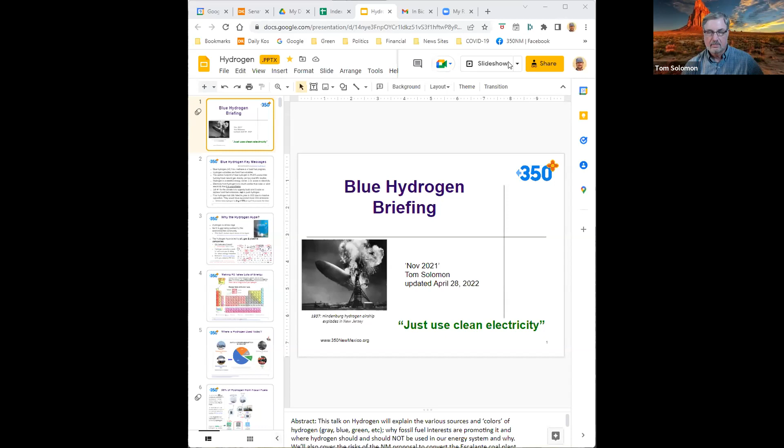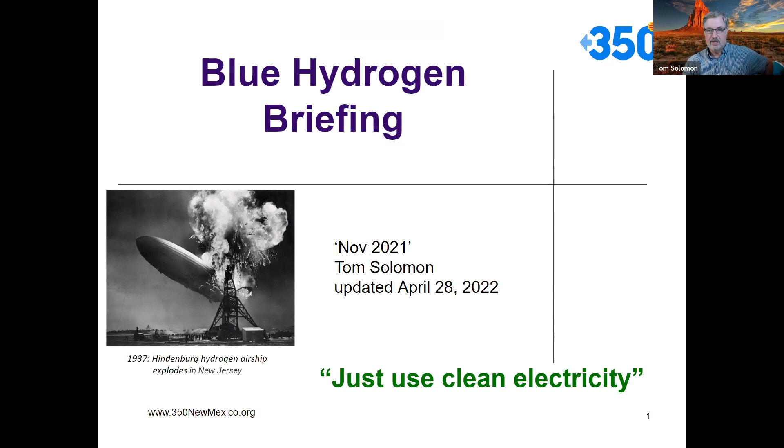So it's called Blue Hydrogen Briefing, and I am Tom Solomon. And that little picture of the Hindenburg blowing up in 1937 gives you a hint about what's to come. Hydrogen is a potentially dangerous gas, needs to be treated with significant care. And in most cases where they're proposing to use hydrogen, just using clean electricity instead is a much better answer.

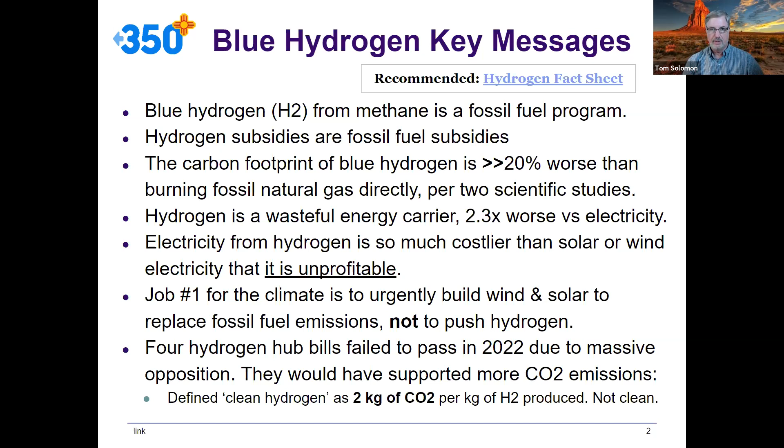So why is all this hype going on about hydrogen? It seems to be all the rage, but if you look within the environmental community, it's not being pushed by environmentalists who understand and really care about preserving a livable climate. And there's a very good report published some months back by Earth Justice that is just one example of the pushbacks that we're seeing from the environmental community. So where it's coming from is actually from the oil and gas and pipeline companies.

It started on or about 2017 with the formation in the European Union of something called the Hydrogen Council. And if you go on their website, you can conveniently see their logo sheet, which I've copied down here. And if you circle, which I did, the logos of the oil and gas companies, you see all of these various examples from British Petroleum to Shell to Chevron, Saudi Aramco and Baker Hughes and Southern California Gas, and oil companies from China and Saudi Arabia,

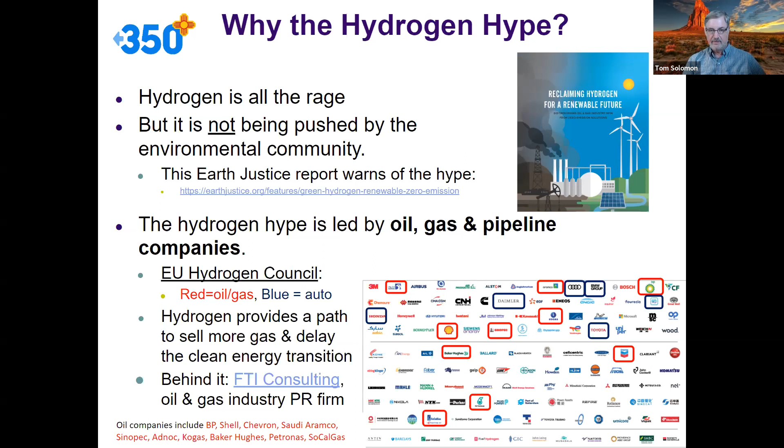et cetera. And so it is really a program of the oil and gas industry to provide a path to sell more natural gas, which is their product, and to delay the clean energy transition, which will reduce the sales of their products and their profits, which they don't like at all. And behind a lot of this marketing hype, which it largely is, is a company called FTI Consulting, which is an oil and gas industry PR firm. So a lot of this hype to push hydrogen as a quote unquote solution to the energy crisis and the climate crisis is from FTI Consulting and oil and gas.

Let's just start with the basics here. So what is hydrogen? It is actually the smallest atom in the universe. That's the periodic table, and here it is in the upper left corner. It contains one proton, so it is tiny, and it doesn't actually occur much in nature by itself.

Molecular hydrogen, or H2, is highly reactive, so you find it in combination with oxygen in the form of H2O, or water, or in combination with various kinds of carbon in various hydrocarbons such as methane, which is CH4, or butane or propane, or all of the other hydrocarbons, but in this example, mostly methane. And so it takes a lot of energy to pry off either the oxygen or the carbon from those complicated molecules to create pure molecular hydrogen, or H2.

So that's why we say hydrogen is an energy carrier, not really a fuel, because you have to invest a lot of energy up front just to create it, and then you have to transport it somewhere like any other fuel to do some useful work down the line.

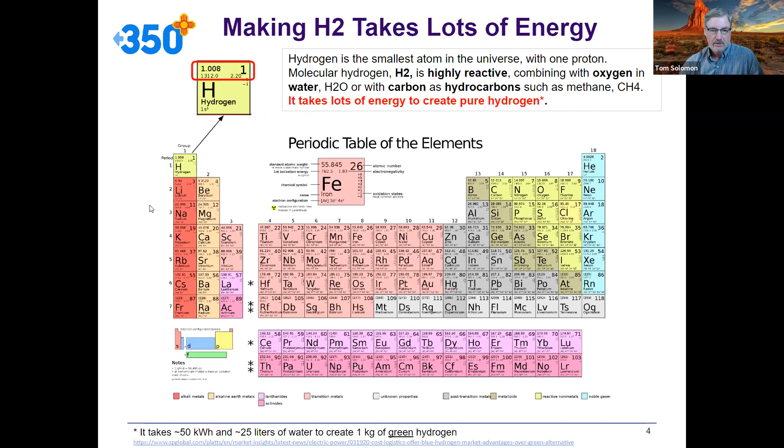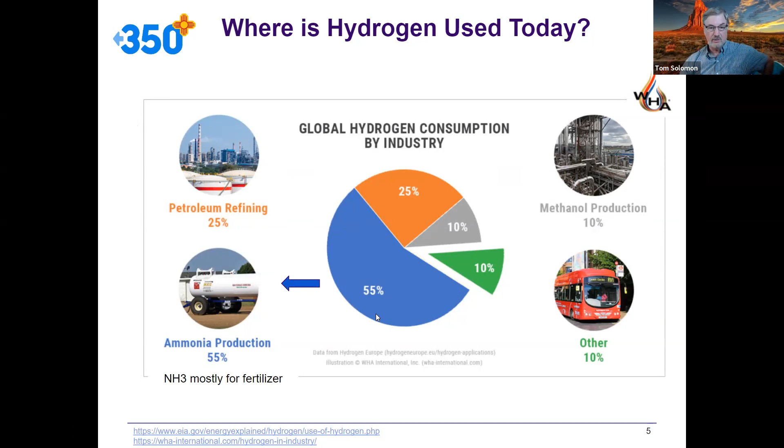Where is hydrogen used today? Well, the vast majority of it is used in producing ammonia, mostly for fertilizer. 55% is that. Another 25% is in various forms of petroleum refining. There's another 10% slice which goes into methanol production, and another miscellaneous 10% other, which goes into other various forms. So it is mostly ammonia production and petroleum refining.

And it is almost all made from fossil fuels today. About 98% of worldwide production of hydrogen comes from fossil fuels, mostly methane. And this is a chart that some groups have put out to explain how you start with some source and then turn it into hydrogen. And I am going to just talk about 3 of these versions of it. This is all hydrogen, but they call them different colors just to denote how it was made. And the cleanest form of hydrogen is what's called green hydrogen.

It releases hardly any carbon dioxide, because if you produce it from 100% clean renewable energy, or maybe nuclear power, which doesn't emit much carbon, at least at the point of production, and you pass that electricity through water in a process called electrolysis, it bubbles off hydrogen and oxygen, and you capture the hydrogen, and that's the purest form. They call that green hydrogen.

But 98% of all the hydrogen that's actually produced is really from methane or natural gas, same thing. And you take this methane, which is CH4, you run it through a very high temperature, high pressure industrial process called steam methane reforming. And that's one of these steam methane reformers. That's what that looks like. And it produces largely 2 things. It produces a lot of carbon dioxide, and then it produces some hydrogen.

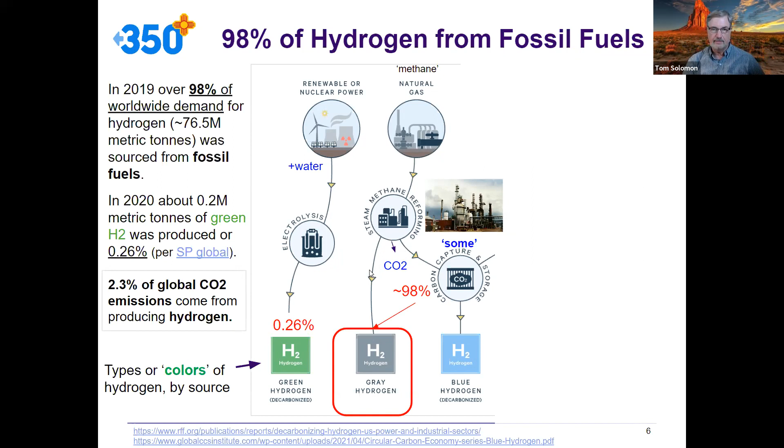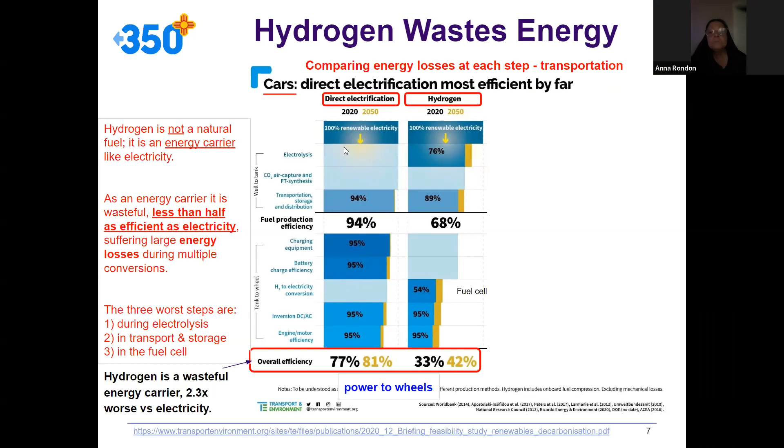And then within the car, you've got to have the charging equipment and the battery storage. You've got to convert direct current to alternating current and then run the motor. Each of those is about 5% losses. And if you multiply all of these losses together, of the 100% renewable electricity you started with, you've got about 77% left to power the vehicle, the power to wheels. And that is actually pretty darn good in the world of energy accounting.

In the case of hydrogen, you start with 100% renewable electricity, and in the green hydrogen version of this, you take that electricity, run it through water in the process of electrolysis, bubble off the hydrogen, capture it, and then transport, store and distribute it. You're already at about 68% efficiency, because electrolysis is only 76% efficient, and it's 89% efficient to store and transport hydrogen.

And then you've got the fuel cell. So within a fuel cell vehicle run by hydrogen, the fuel cell starts with hydrogen, runs it through, creates electricity, and that is then used in the remaining portions of the electric vehicle, converting it from DC to AC, and then running the motor. All of these losses multiplied together mean you've only used 33% of the renewable electricity you started with in the case of a hydrogen car to power the wheels.

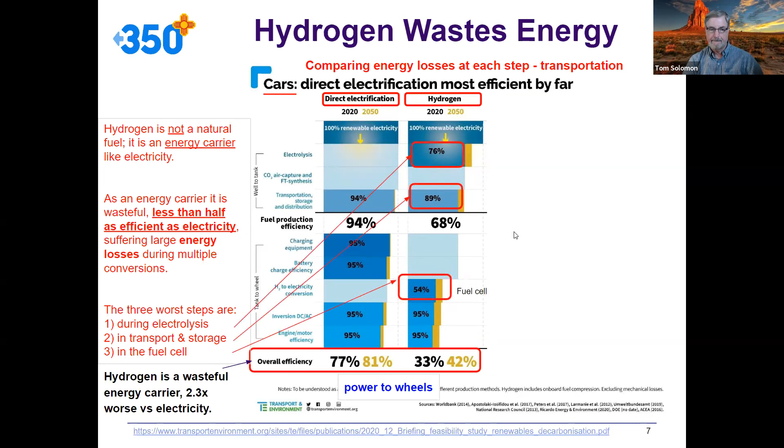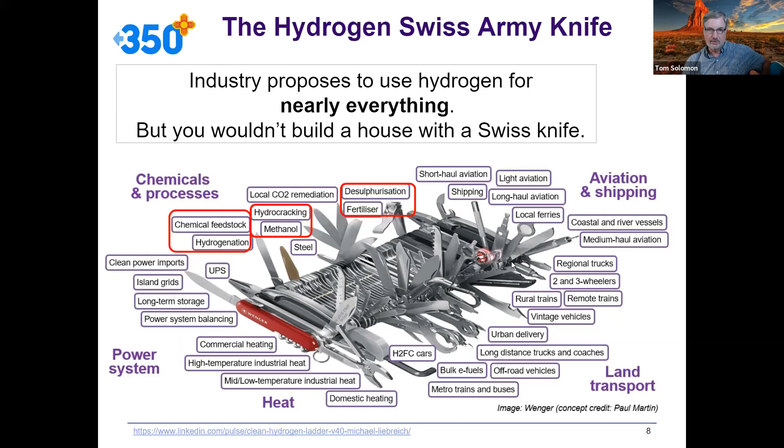But they're proposing also to use hydrogen for aviation and shipping, for ferries, for regional and long distance trucking, for urban delivery, trains and buses, domestic heating, industrial heat, electricity generation, all sorts of stuff. And in fact, theoretically, all of those things are possible, but they're not economically feasible because they've got to compete with something better, which is direct electricity. So just like you would never use a Swiss Army knife to build your house, you would use electric power tools. You're not going to use hydrogen for a lot of these things.

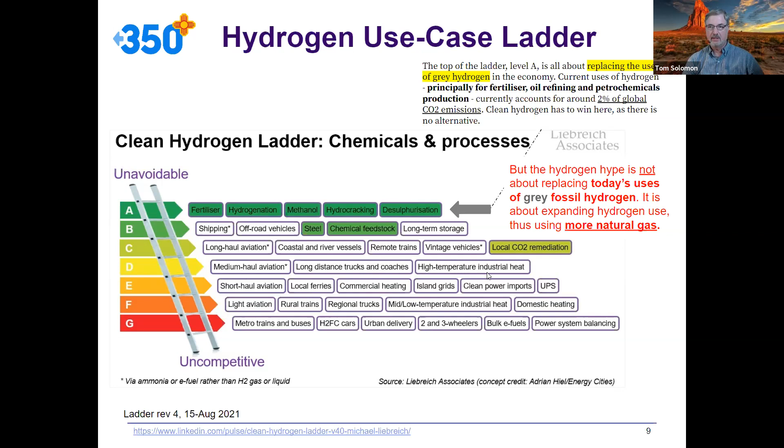So after that introduction, I want to focus on a very particular example here in New Mexico that is a project that is underway right now. And it is to convert an old 40-year-old coal-fired power plant in the middle of New Mexico, just outside the town of Prewitt, not far from Grants. And it is called the Escalante Coal-fired Power Plant.

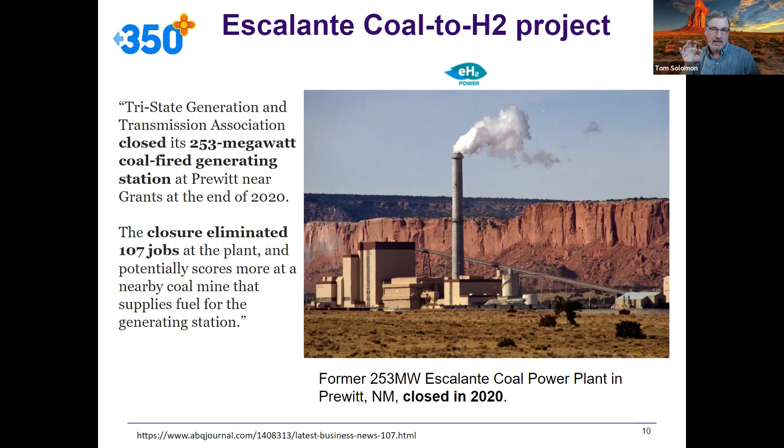It was closed in 2020 after about 40 years of operation. It used to be a 253 megawatt coal-fired generating station, sort of medium-sized. It used to employ 107 people there, but they've been laid off largely because the plant closed in 2020. A company called EH2 Power, which stands for Escalante Hydrogen Power, was formed in order to convert this old coal-fired power plant to both produce hydrogen and then to burn it for electricity. And we're going to talk about that.

But to do that, and the process of converting it and doing all that work, they have to do a bunch of things first. They have to build what's called an air separation unit, which is a way to cryogenically freeze atmospheric air into its components of argon, oxygen, and nitrogen, because they need to use that oxygen in the power plant, in the steam methane reformer. They have to build that steam methane reformer, that big industrial facility, to take the natural gas and convert it to hydrogen. And then all that carbon dioxide comes off. The question is, what do they do with that?

So then they have to build a carbon dioxide sequestration unit, which I don't have a picture of, but that is a third part of what they need to build new on this facility to do what they're planning to do. To run all of these three things takes a bunch of electricity. So any electricity that they generate at that former coal-fired power plant, which will be converted to burn hydrogen instead, will cut the actual amount of electricity that they could send to the grid, because they've got to power these other things internally first. That's called parasitic loads.

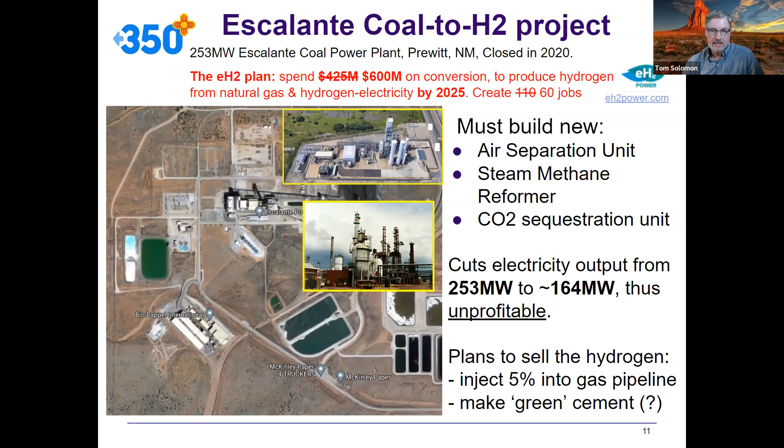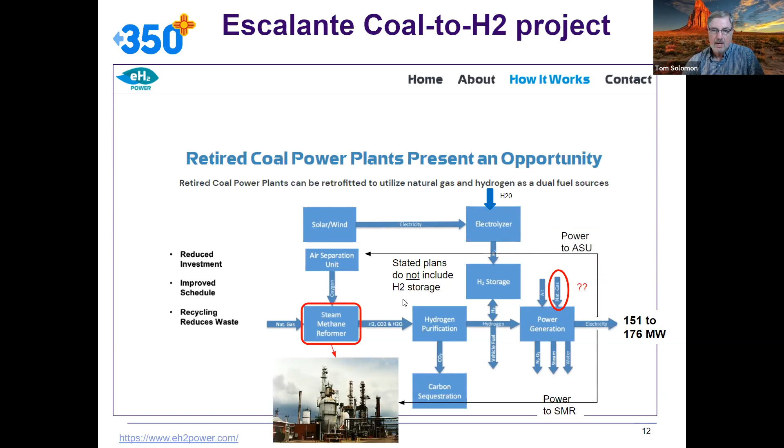So this is just explanation of the flow chart that they put on their website, showing the air separation unit, the steam methane reformer. This is from their website, by the way. Hydrogen purification, generate power, all of that stuff. These black lines I put running off of the output of electricity, just to show you that they've got to have a parasitic load to run the air separation unit, the methane reformer, and the carbon sequestration unit. So that's the plan of Escalante Hydrogen Power. I'm going to skip this slide, a little too detailed.

Remember I talked about them planning to possibly blend some of that hydrogen into a natural gas pipeline that is actually already nearby. And why would they do that? So there's a company called Lazard Investments and Banking that does the gold standard of analyzing the cost of generating electricity from various sources, various kinds of renewable energy, conventional energy, from natural gas, nuclear, coal, gas combined cycle. And they have the costs from high to low for each one of these things.

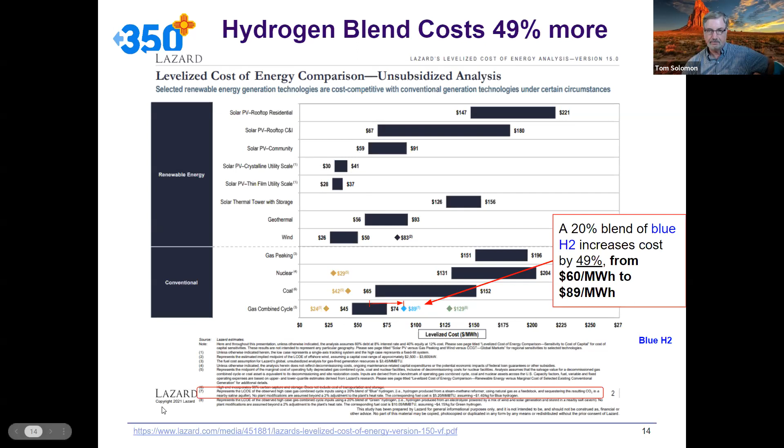Who funded Escalante Hydrogen Power? Well, according to their press release on their website, a company called Tallgrass Energy funded it, and they put on their website a press release: Tallgrass Energy acquires 75% membership interest in Escalante Hydrogen Power. So who is Tallgrass Energy?

Well, they are an owner and operator of about 8,300 miles of natural gas pipeline plus some 850 miles of crude pipeline. And so they are in the business of shipping and then selling natural gas mostly. And that's what the Escalante hydrogen facility is planned to do, is to take this natural gas. So they're looking presumably to create another customer for their product.

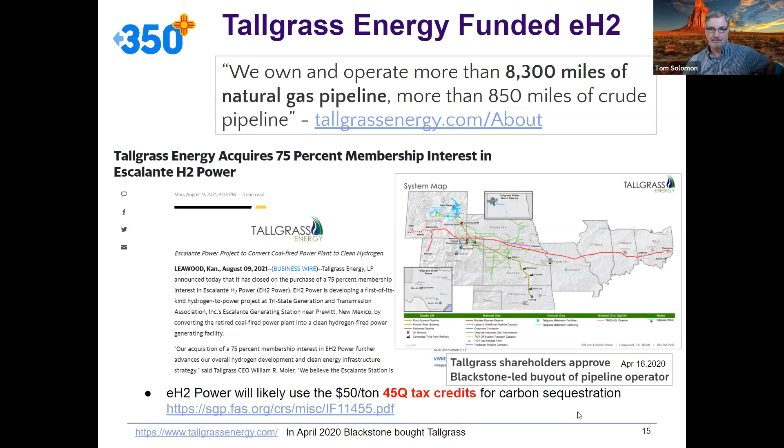The other thing it looks very likely that EH2 Power will do is to mine the federal tax code for something called the 45Q tax credits, which is a federal tax credit created to provide a benefit to people who do carbon sequestration. And they get to write off about $50 per ton of carbon dioxide sequestered within this part of the federal tax code. So that's their plan for producing hydrogen and for making it profitable, funded by natural gas.

There is another company in New Mexico looking at producing hydrogen from methane or natural gas, and it's called Bayotech. Bayotech is a spinoff of Sandia Labs, and they make these things called modular hydrogen hubs. They look like this, about the size of a big house. And according to their website, they produce gray hydrogen from natural gas with what they call a more efficient modular version of steam methane reforming.

And it emits lots and lots of carbon dioxide. In fact, it emits 9,000 kilograms of carbon dioxide for every 1,000 kilograms of hydrogen produced. So a 9-to-1 ratio of CO2 climate pollution for every bit of hydrogen they produce, 9-to-1. And they also produce NOx emissions in addition to the CO2. NOx is an additional air pollutant that needs to be regulated. It's a precursor to smog.

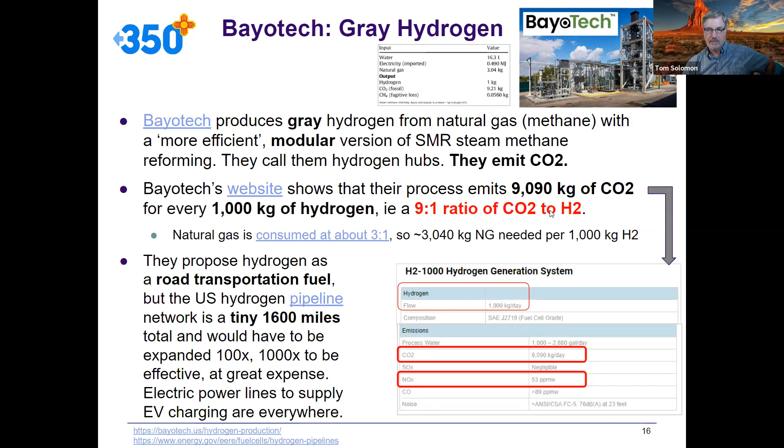So this is another proposal for what to do in New Mexico with hydrogen hubs. I think the proposal from Bayotech would be to make these units and possibly place them next to the interstate highways and produce hydrogen for fueling hydrogen powered cars or trucks along the interstate. But they would be producing lots and lots of carbon dioxide as a price for doing that.

So let's look at the science. There have been at least 2 very good peer-reviewed scientific papers published about what is the carbon footprint of producing blue hydrogen. And the first one was published in August of last year by 2 PhD scientists called Robert Howarth and Mark Jacobson. They're from Cornell and Stanford universities. And their paper is called How Green is Blue Hydrogen?

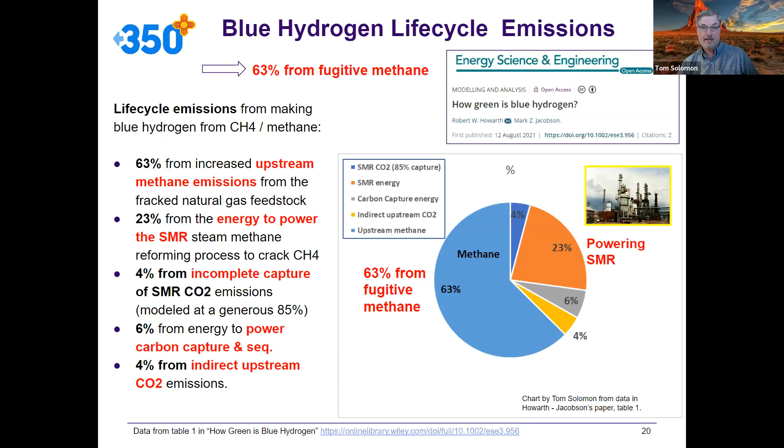This is the second paper that was published, warning of hydrogen climate impacts. This was actually published out of Australia in the journal Applied Energy, November of 2021, by Fiona Beck, a scientist from Australian National University, who came up with similar conclusions: that making hydrogen from fossil fuels produces substantial greenhouse gas emissions that are the driver for global warming. So scientific paper number 2, fully peer-reviewed science.

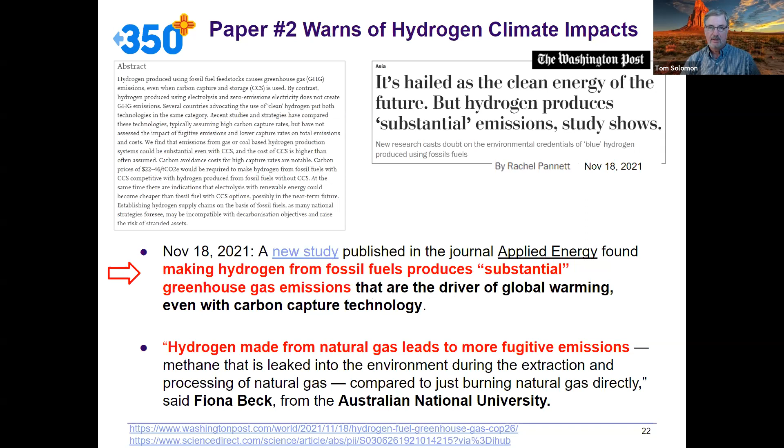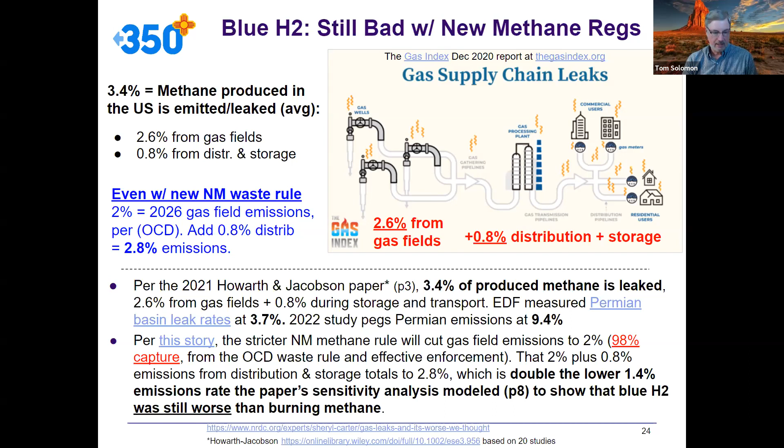But that's 2% from the fracking fields. Then there's all of the pipelines that go to the end users, from which about another 0.8% is lost, and the state of New Mexico is not doing anything about those. The bottom line is that even with the new methane waste rules and clamping down on fracking field emissions, it's not going to get anywhere near low enough in terms of upstream methane leaks to meet the requirements of making this a quote unquote clean hydrogen fuel, because upstream methane emissions, despite their best efforts, will continue to be a significant problem for the climate.

And after that, earlier this year came this quite frankly shocking report, a scientific study published in March of this year, a very extensive actual survey using airborne equipment, looking at 26,000 active wells over 35,000 square kilometers. And they concluded that we're actually emitting methane to the tune of 194 metric tons per hour in the Permian Basin, which is not 2%, it's not 3.4%, it's actually 9.4% of all gross methane gas production in the Permian Basin leaking into the atmosphere today. So the actual situation is dramatically worse than what was modeled in those papers.

So that makes burning Permian natural gas something like maybe 3 times worse for the climate than just running a coal plant, because of this uncontrolled fugitive methane emission. Now, this is part of the problem that the state of New Mexico and their new methane rules are trying to fix, but it's going on right now and they've got a lot of work to do, and we are nowhere near hiring and retaining enough people in those agencies to police this amount of pollution.

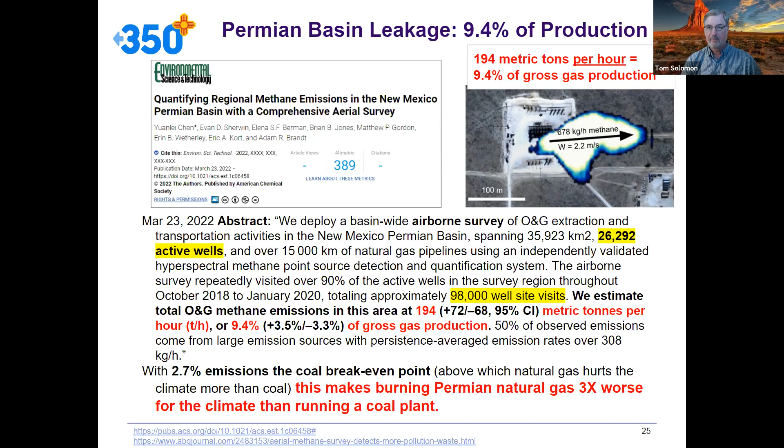So what is methane doing to the atmosphere? It is driving about 25% of all global warming, according to the reports of the IPCC, the Intergovernmental Panel on Climate Change. The reason why is that methane is a very powerful greenhouse gas with a global warming potential over a 20-year time frame that is 84 times worse than carbon dioxide, the main greenhouse gas. So a little bit of methane leakage multiplied by 84 gives you the impact of that much versus carbon dioxide.

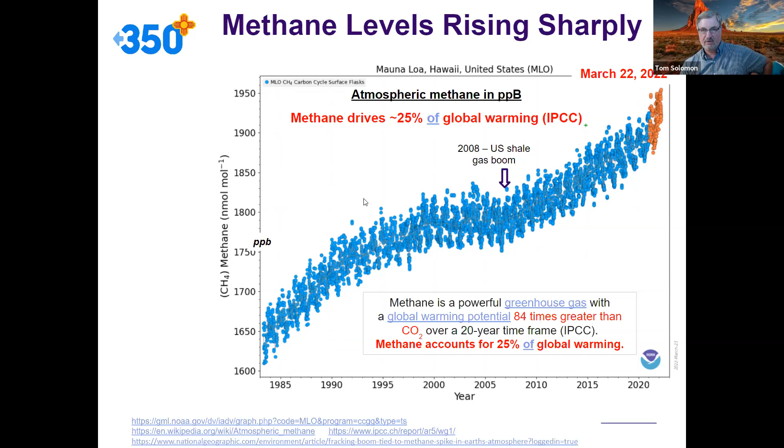It is a terrible source of greenhouse gas emissions and accounts, as we said, for 25% of all global warming, and it is going up. Since 1985, we used to see atmospheric concentrations of 1,600 or so parts per billion. Since 1985 all the way over to March 2022, we saw this dramatic increase from the 1,600 range up to the 1,900 range. And it is tied to the timing of the 2008 US shale gas boom, which was documented in this article published in National Geographic.

And so you just look at when the shale gas boom happened, and this plateau, which I'm not sure we completely understand why it flattened, but it went back up again dramatically as we really began fracking. So fracking is causing significant increases in methane releases. Anything that we do to use more natural gas means we extract more of this, which will mean more methane leaks, which will mean more impacts on global warming because of this.

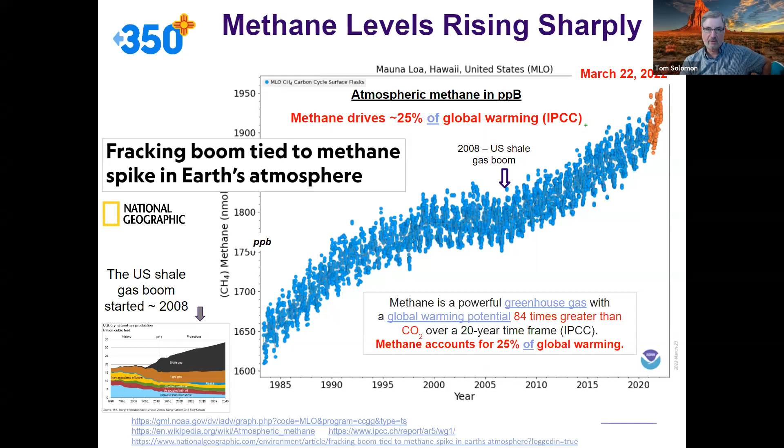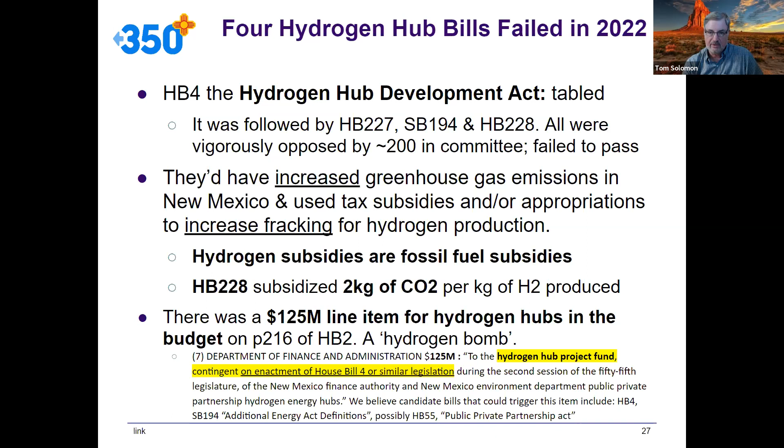So if you remember, there were 4 hydrogen hub bills that were proposed in the state legislature to subsidize the production of hydrogen from fossil fuels, from natural gas, methane. They were actually all defeated because of a tremendous turnout by activists showing up in hearings and calling legislators saying, don't do this. This presentation that you're seeing today was actually presented to 26 of our legislators to give them the background to understand why this was a bad idea. So thank you all activists for helping to do that.

Since then, the state government announced that they were going to join a potential consortium of 4 different states, Wyoming, Utah, Colorado, plus New Mexico, in a multi-state hydrogen hub initiative. And that is going on now. And I believe that will be discussed in the meeting coming up in the Legislative Finance Committee next week.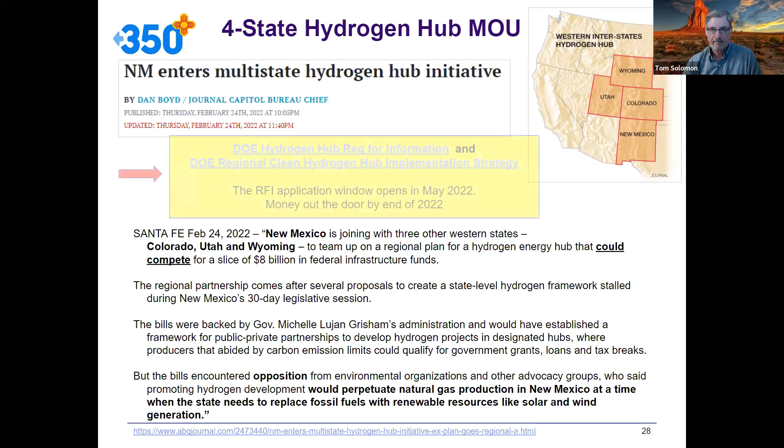for $97 million less than their original estimate, which would leave you $97 million that you could invest in some job creation in the town of Prewitt. Highly confident that we could figure out a way to employ 110 people in Prewitt with $97 million. In fact, you could just pay 110 people $88,000 a year for 10 years with that kind of money without doing anything. So there are much better alternatives than to do what they're proposing. And this is where my math is.

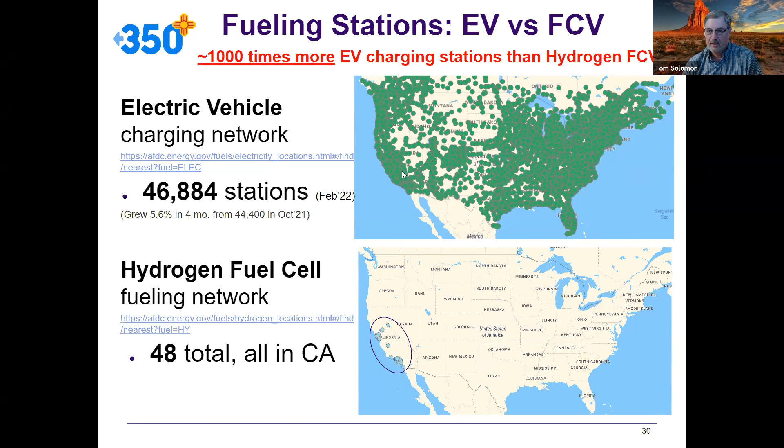Compare that to the hydrogen fueling network nationwide, which literally exists only in California. Only in California. There are 48 total hydrogen fueling stations in the state of California. There are none in the rest of the nation. Any proposal to use hydrogen as a fuel for nationwide trucking or cars has to build first a nationwide fueling network for hydrogen, which does not exist, and to compete with the already growing and low-cost charging network for electric vehicles.

There is such a thing as hydrogen fuel cell vehicles. There are 3 main ones from Toyota, Honda, and I think Hyundai. The main seller is the Toyota Mirai. That's what it looks like. Those 3 vehicles together sold a total of 3,341 vehicles in all of 2021, compared to US electric vehicles, which totaled about 180 times more at 600,000 electric vehicles.

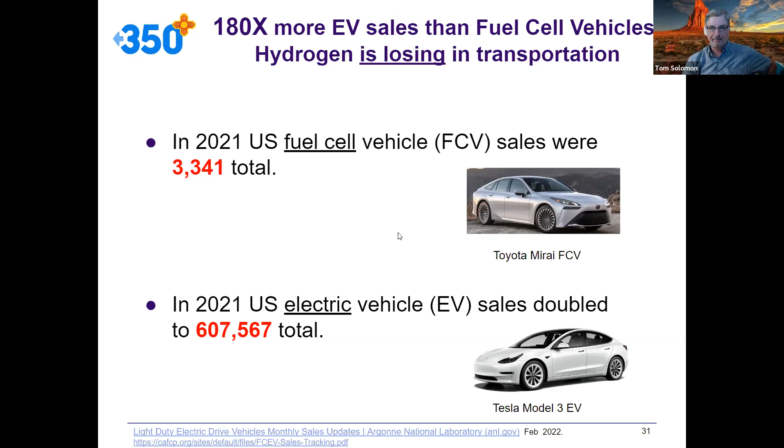So the fuel cell vehicle market is not taking off despite a lot of subsidies being applied by Toyota specifically to do that. And there are much better ways to solve most of the hard to decarbonize sectors that the hydrogen proponents talk about. This slide is maybe a little bit more in depth than I want to cover today, but you can review it later.

One of the things that the hydrogen proponents talk about is that industry needs to be decarbonized, and it could be responsible for 23% of direct emissions. There are lots better answers for a lot of the things that they're talking about. And most of the hard to decarbonize sectors, which are really steel, cement, plastics, and chemicals, have better alternatives. Some of them, we still will need green hydrogen, especially for steel. But that is

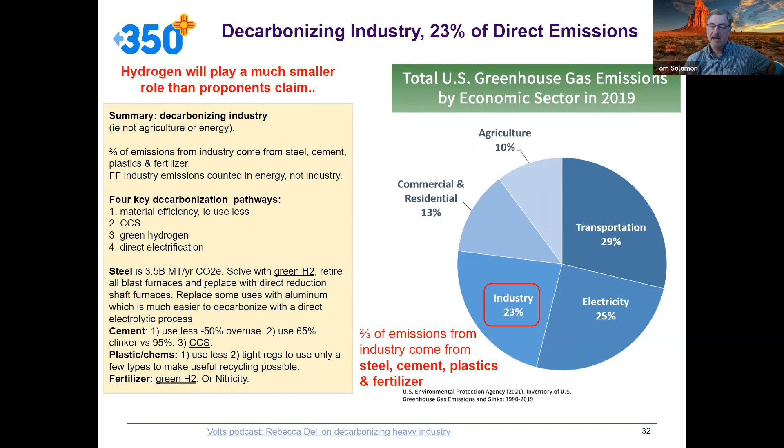not the top priority. What we should be doing instead as job one, because half of carbon emissions worldwide come from pretty much generating electricity and running our transportation sector, burning gasoline and diesel in our fuels. We do that by rapidly building out clean renewable energy production in the form of wind and solar, and then use that to electrify everything like electric vehicles. That is job one for the climate. That's where we should be focusing. Hydrogen is a dangerous distraction from doing that.

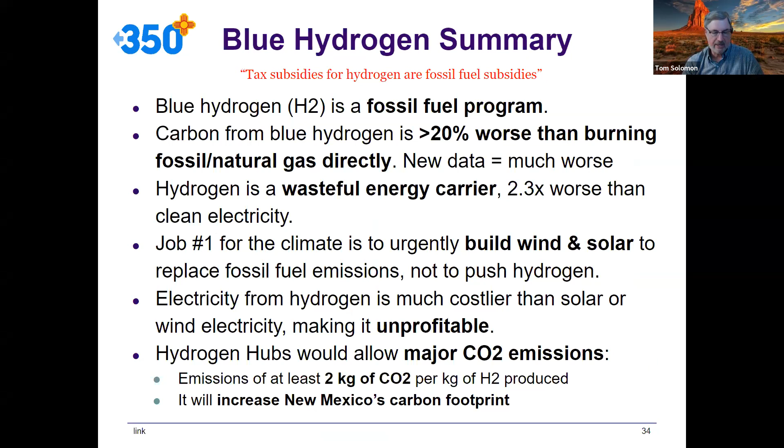And that is kind of the end of my talk. This is the summary slide, just a repeat of where we started. Blue hydrogen is a fossil fuel program, and the carbon produced from making blue hydrogen is at least 20% worse than just burning natural gas directly. We now know that in the Permian Basin, it's much, much worse than even that because of how much uncontrolled release and venting there is of methane.

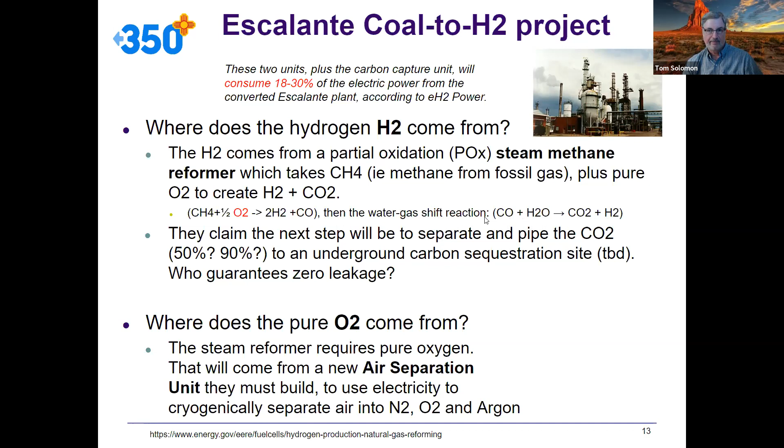takes methane, CH4, plus pure oxygen in a chemical reaction that looks like this under the conditions of extremely high pressure and temperature. So they use high pressure, very high temperature steam to run this reaction. Methane plus oxygen creates hydrogen plus carbon monoxide. And then there is something called the water gas shift reaction, which takes the carbon monoxide plus more water, which is the steam, and converts it to carbon dioxide plus hydrogen. That is the chemical reaction that happens in a steam methane reformer. All right, and that's probably as much as I want to say about that.

Anna, I see your hand up. Yeah, I just wanted to recognize we have a young organizer on the call, Jessica Kitzel. Hi, Jessica. She's from Tó Nizhóní Ání, and Jessica is from Black Mesa. Great. Jessica, if you want to unmute and wave or say a few words, feel free. Okay, Jessica has in fact invited me previously to make this presentation to a couple of Navajo chapters, and I've done that in the last few months, and I'm willing to do it again if they need to. Excellent. Yeah. Okay, and Crystal said bye.